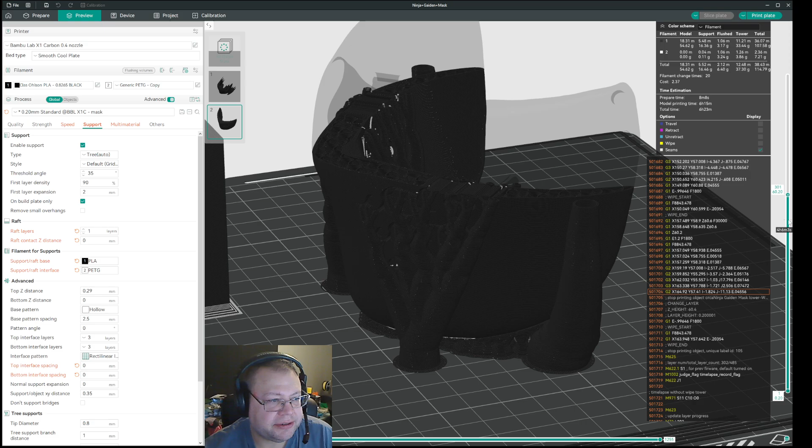Okay, welcome to a new small video. In this video I'm gonna talk a little bit about tree supports and the fact that, like in this picture here, I'm trying to use PETG as a support interface to easily remove the supports, but

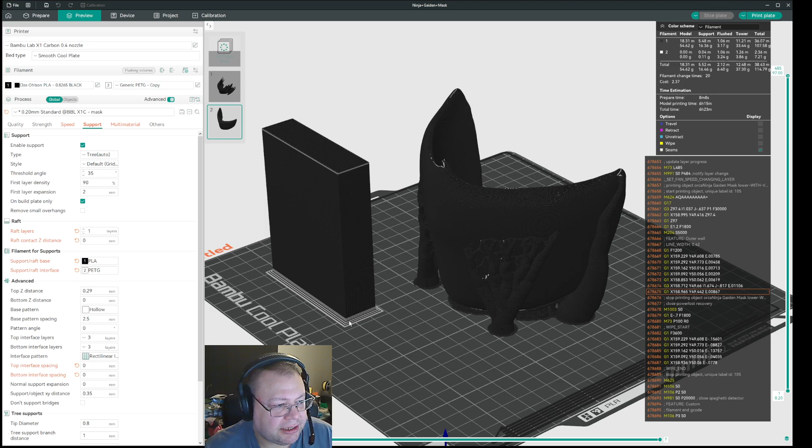as you can tell from the purge tower, there are no actual support interfaces here, because you can see there's white there and there's white there, and white here is the PETG. So basically you can see here on top there is no support interface on the top of the tree supports. So this video I will show you how you can put it there and why you should not put it there.

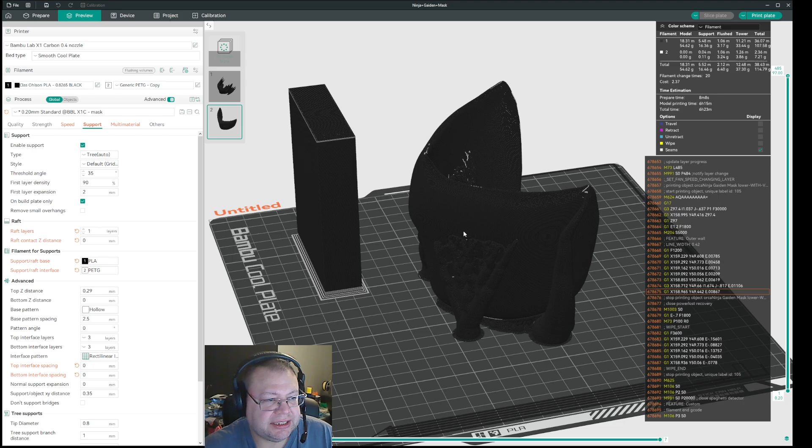So basically the tree supports up here at the top have a certain diameter, and it goes without saying they need to have a certain diameter to be able to support the structure above. When you print with just one filament, it's not really a problem because it will just bridge over it. But when you use a support interface with a different filament to be able to easily remove the supports, then you have a sort of a problem.

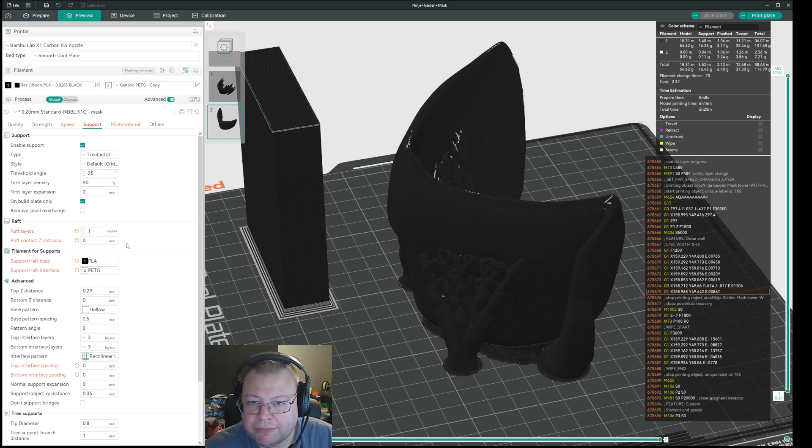And in this case, you can see here, I have selected PLA as the support structure, and I have selected PETG as the support interface, and I have 3 top layers and 3 bottom layers for it. And I set top spacing to 0 and bottom spacing to 0. And I want to use one raft because I want to be able to easily remove it.

So let's go and see on the raft. The raft looks like this. That's the raft, that's white. That's the supporting underside of the PETG. And you can tell everything else here is pre-layout for the tree supports. So when we build up this, you will see you get the,

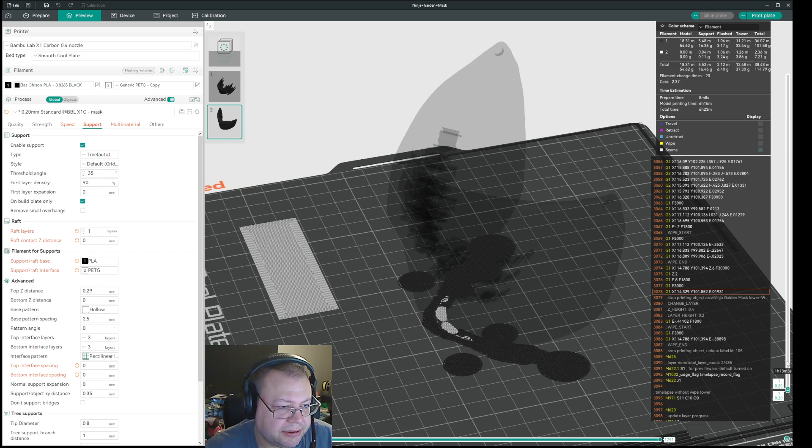let's see, so here you see on layer 1, that's the raft, which is white, and then you start getting the black here. That's the first part of the model itself, and then it starts printing, and here you see you have support interfaces, because the size of the supports is there, and you can see that it's building the model on top of the support interfaces.

And I have 20 filament change times, as you can see up here, and all of those filament changes are at the bottom. So if you count the layers, you get to layer 18, so almost all of them. Let me see. Layer 16 is the last one. You can see there's a change here, so 16, and then it's only printing PLA after that.

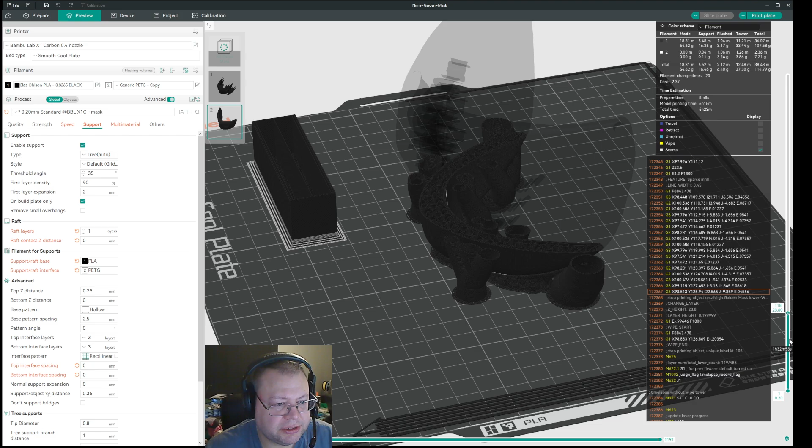And then you can see it's building the support structures for the tree supports, and as you get towards the place where it's supposed to support, it will get narrower and narrower and narrower. And in some cases you can see that here it is already supporting, but it's not giving any interface layers for the supports, as you can see. And now it's done with all the tree supports. There's still no interface layers.

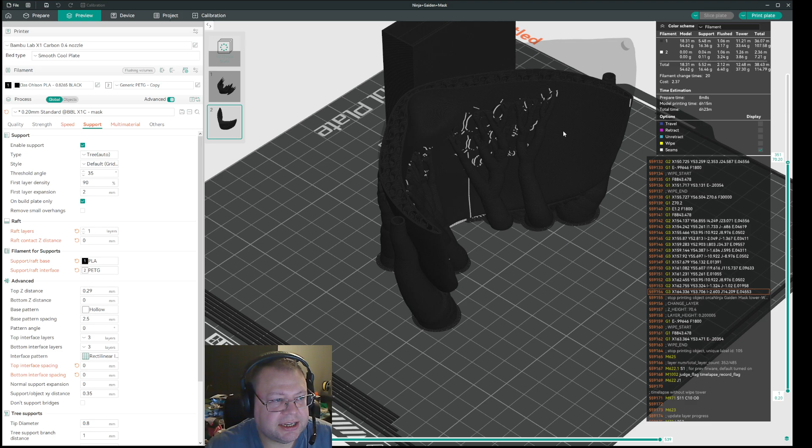So what has happened here is that it has printed the bottom parts with PETG supports, but it hasn't printed the top ones. But it does get to the top here. If we go down a little bit so we see exactly where you have one there. That's a tiny nudge of PETG. And another one, and another one. So that's 3 layers. And then it prints on top.

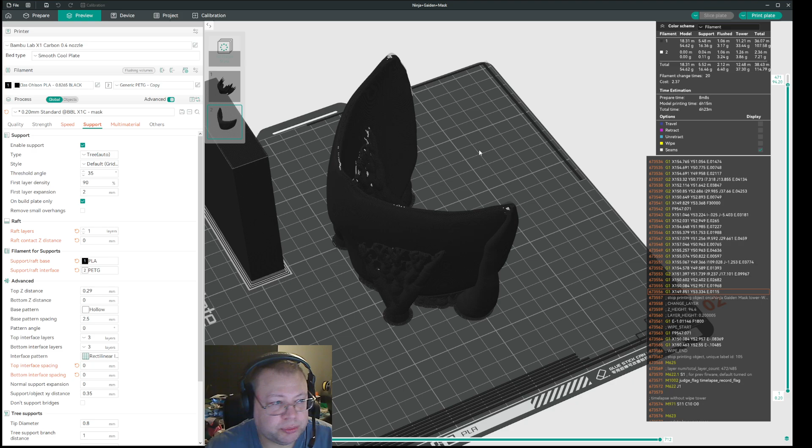If you consider how much filament would have to be wasted to print those small nudges of PETG, I would rather, in my case, just not use supports there. There's also a little bit here on those layers. There, and there. And then there's nothing. And that is all that is there to print. And to get to that point, it would have to waste all this black filament and all this PETG filament just to be able to print those 3 layers of small nudges there.

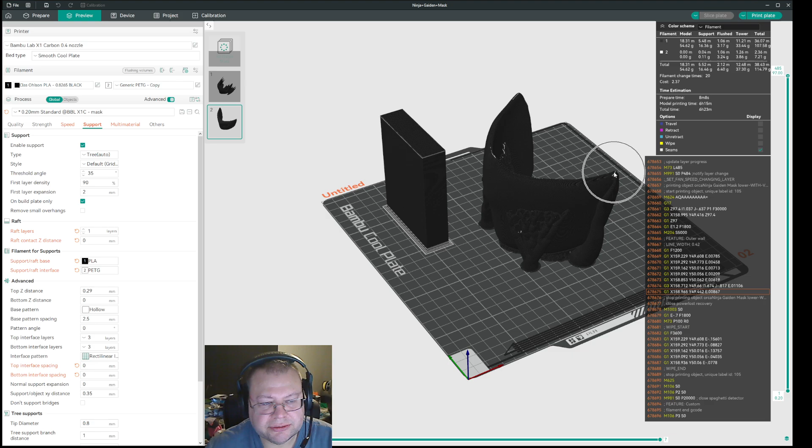Now, the main problem I wanted to address is that in some cases you want to put an interface layer on top of a tree support, and you have this problem here. So how do you do it? Well, there is a setting in Orca Slicer / Bambu Slicer which is called tree supports.

Sorry, it's under the tree support. Under support, and then you need to have selected tree, blah blah blah. Okay, and then at the bottom you have tree supports, and then you have something called tip diameter. It refers to the topmost tip of the tree support. And if you hover over it, it says branch tip diameter for organic supports.

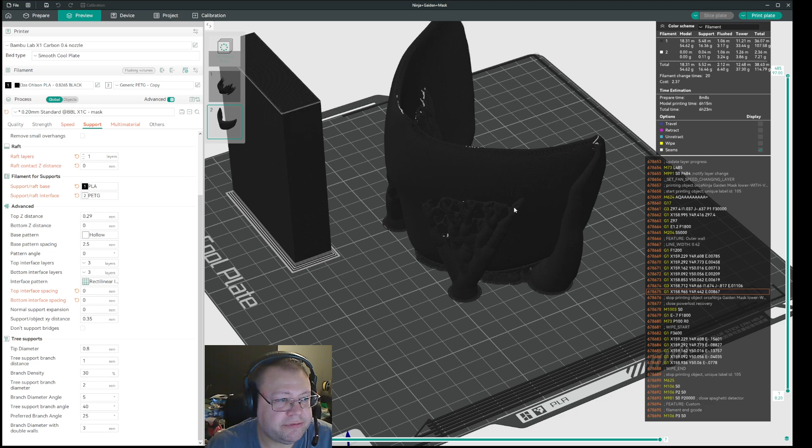That means that this value identifies the minimum value that a tree support tip needs to have to be able to add interface layers. Otherwise, it would just print straight on it. In this case, every single one of these supporting structures, even on the back here, everything here is below this value in the diameter of the tip, which means that it will not create a top interface layer with PETG.

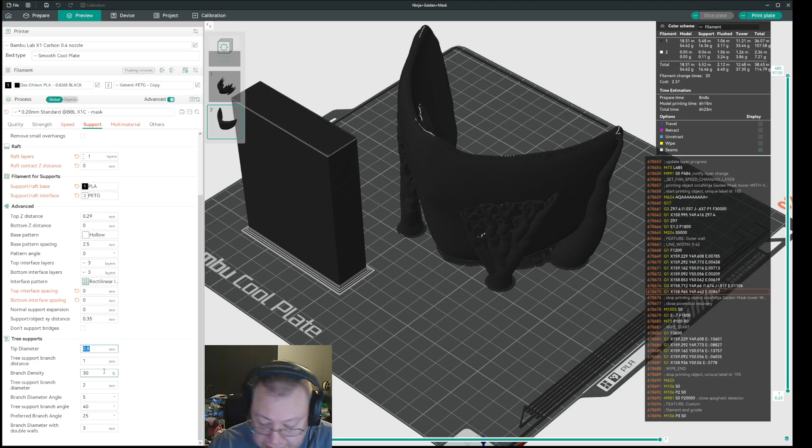So let's just say I want to reduce this to make it print. So I set it to 0.2. Then you get an error: organic support tree diameter must not be smaller than the support material extrusion width. Okay, so let's go to quality and check how big the extrusion width of the support material is. You can find that here under quality and support, and you see it's set to 0.42. So if I take that value and go back to support and replace that value with 0.42, the error goes away.

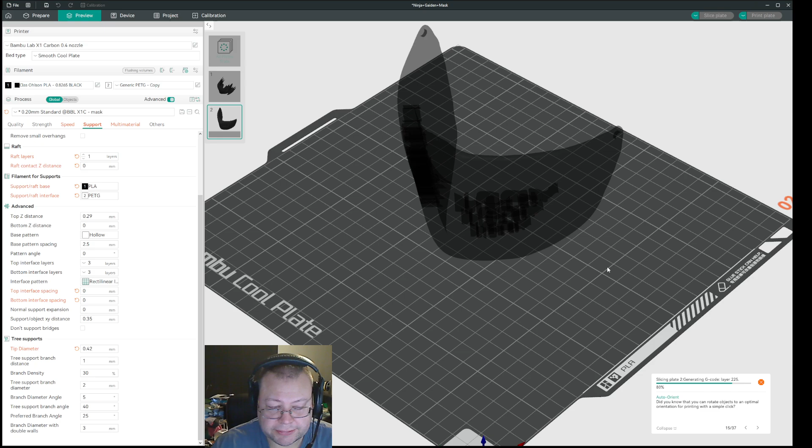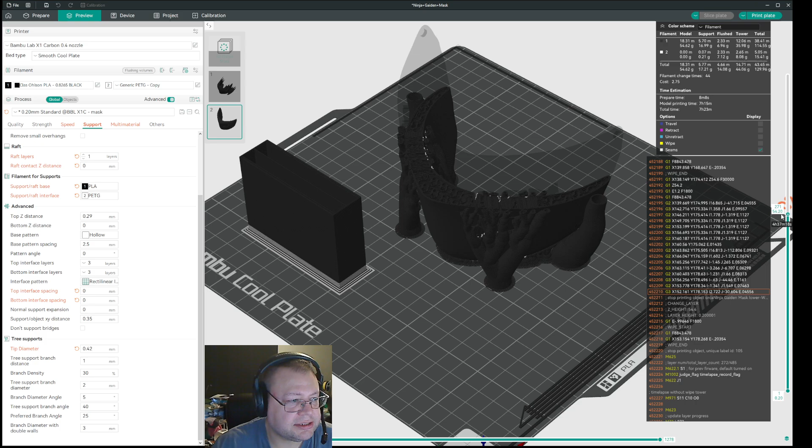What happens if you slice it again? Remember, we had 20 filament changes before. Now I have 44 filament changes, you can see here. And you can also see that some interfaces have been written, and on the purge tower there have been written interfaces. So let's go down a bit into the model and analyze this. Let's say we are looking at the model and we'll just go up layer by layer.

There's the first layer. Where is the PETG on this? It's there. Exactly there. And is there more? Seems to be a little bit there. Okay, then you get a black one on the same level, line above. And then you get another one. Where is that? The small nudge there. A little bit here, maybe that's a seam. There's a little bit more here. And there's a small tiny nudge there.

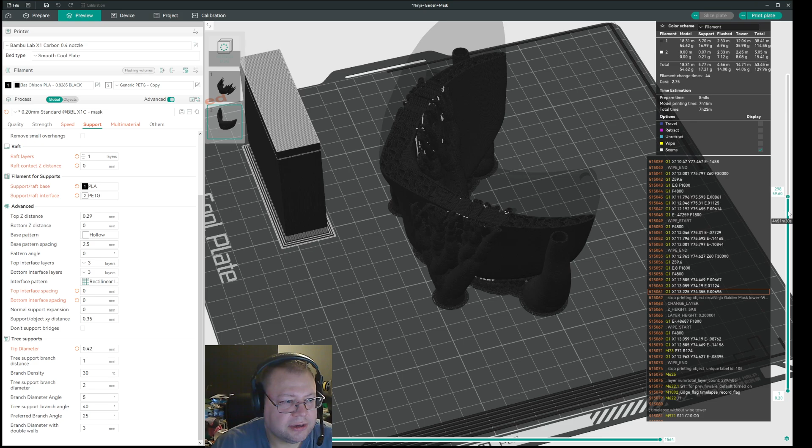And then it's just black, and then it becomes tiny support interfaces here and there, and a little bit there again. And you can see in this area here there are just a few support interfaces painted, and here.

So imagine that you're printing, and for every single layer there, it's flushing, it's printing to the purge tower, it's wasting a lot of filament just for these tiny small pieces, which may not have any relevant function when it comes to removing the filament. Now, the big thing here is that we have reduced the size that should be used for filament interface. We said that if the tree support tip is above 0.42 millimeters, you should print interface layers. That's what you do with this setting here.

But you can decrease that a little bit. Remember that you can reduce this below 0.4. So let's say I set it to 0.3. And you see, it cannot be smaller than the extrusion width. But you can also change the extrusion width to smaller than that, 0.3. So if I set that to 0.3, the error goes away.

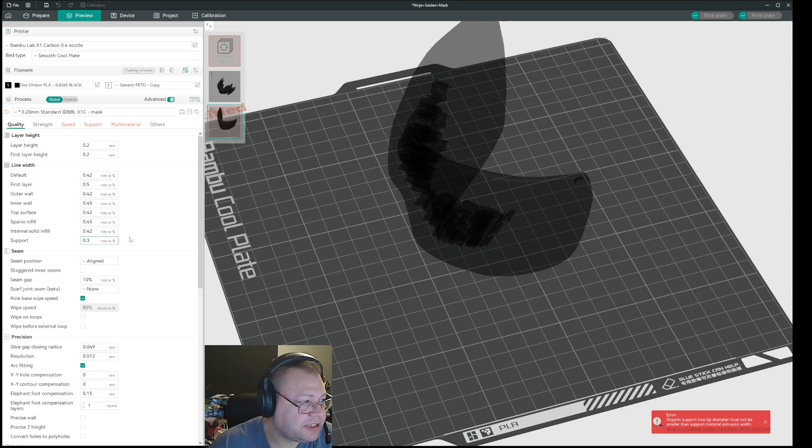What you have to remember is, imagine you have a chewing gum, and the chewing gum has a fixed diameter when you pull it out. If you're reducing the extrusion width, you're stretching that piece of chewing gum. On an FDM printer, what happens is that it lowers the pressure and at the same time it keeps extruding, so there's less pressure while it's extruding, and the width of the line becomes smaller.

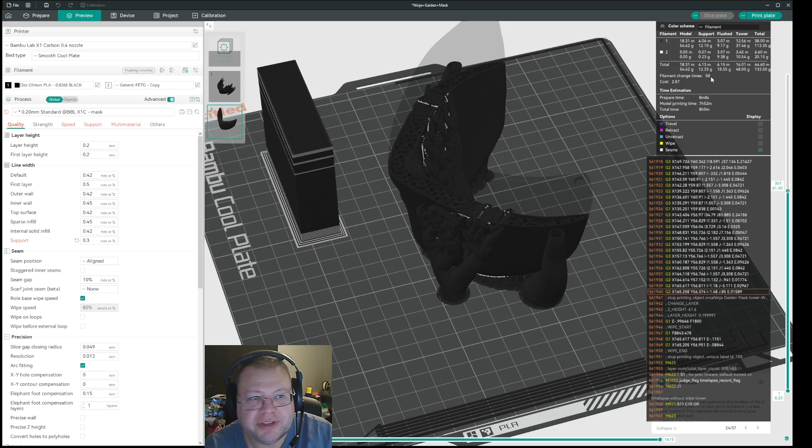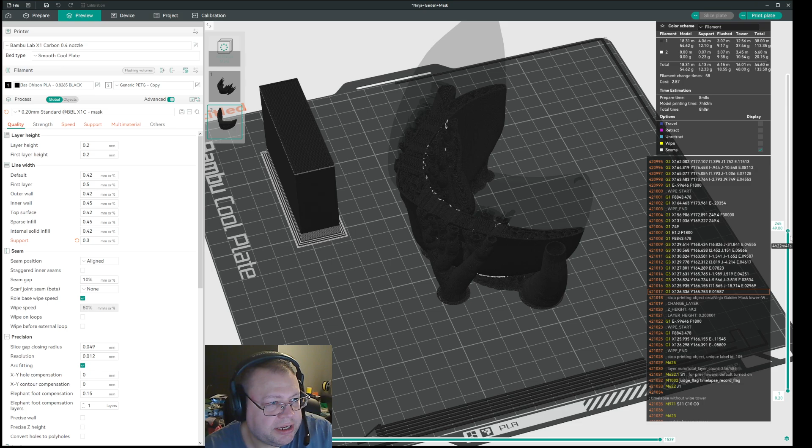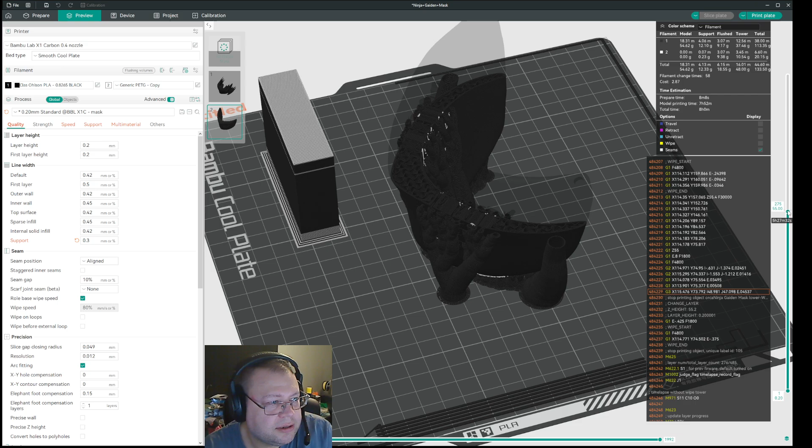When you reduce the width of the support, you can see here that I get 58 filament changes, and you can also tell that there are more filament changes here. So let's analyze a bit. It's there. Just check the model, it's here and there mostly, and it keeps building, and then it's finished, and then it goes a little bit more, and it has just a small nudge here and there, and it continues to go up. There are a few places here and there, and it continues to go up again.

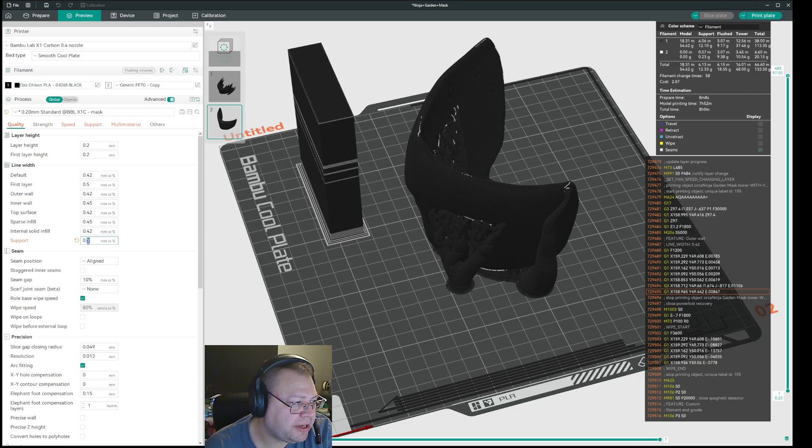It's not printing much PETG to work as interface. Then it just continues up, and at the end you get interfaces here and there. So you're wasting a lot of filament to cover interface layers in very small areas. I usually don't put my line width below 0.4, because it would sometimes not look good on the print, since you're using a 0.4 nozzle and trying to force the width to less than the nozzle width.

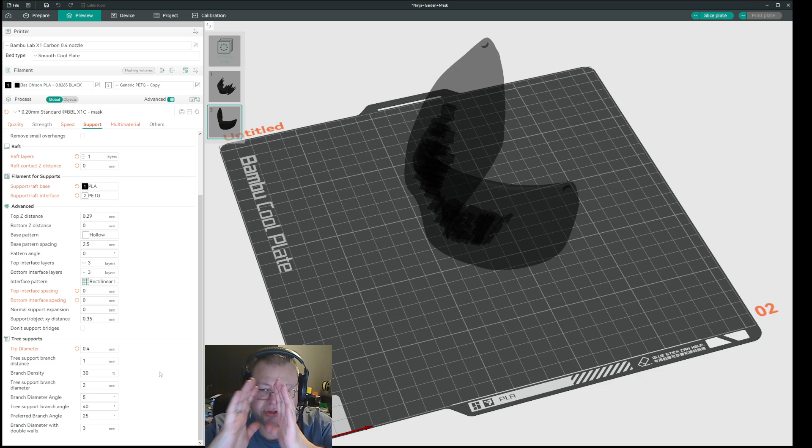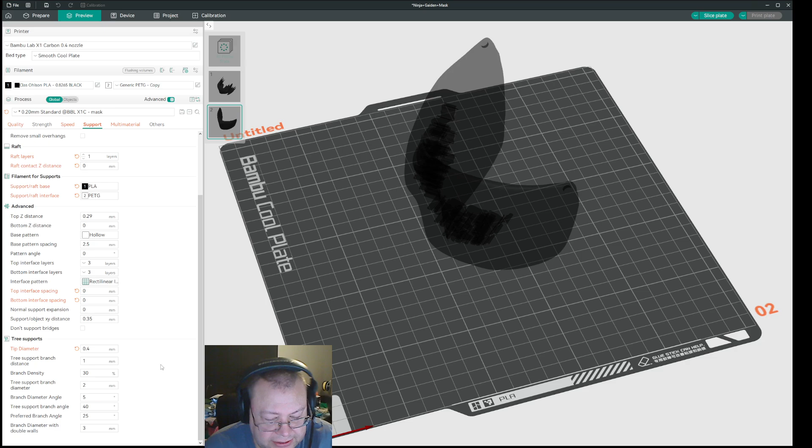So my recommendation is, if you're using tree supports, unless you're supporting something that is really wide and you have a really big tip of the tree support, then I would not use an interface layer using a different filament type like PETG, because it would just be a lot of wasted filament to get there, and then it's finished. There's no point. Just remove that with a file afterwards, and it's a lot less wasted filament.

Now, the other part of this video: in the original video I made, I actually had to make a sub video because I forgot about it, but now I'm going to do it. So I've reset the tip diameter to 0.8, and I'll reset this one to what it originally was. Okay, so I'll slice the plate. I'll show you what I mean in the second part.

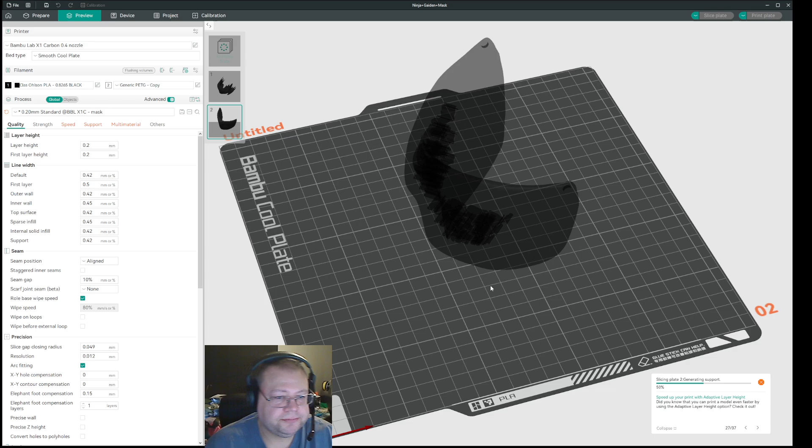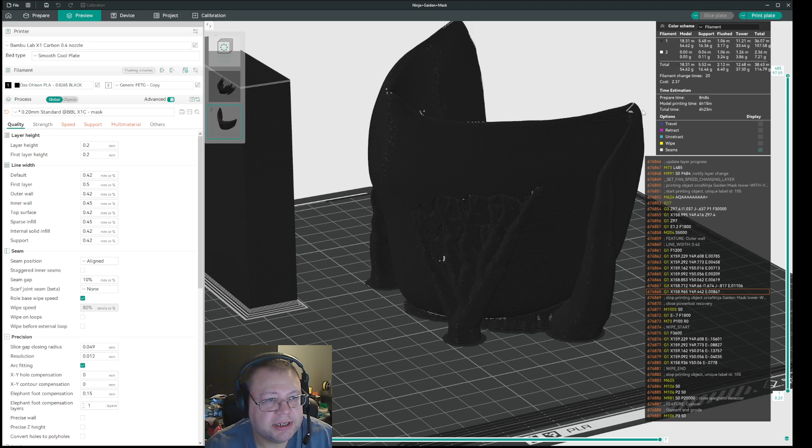So you can tell here that because the diameter of the tip of the support is so small, it's not using interface layers. Perfectly fine, but why is it doing this? It's because these small areas on top of this tree support are actually above 0.8, like here. It's above 0.8 millimeters in diameter. Hence, it will waste filament to get to the top to print those support interfaces.

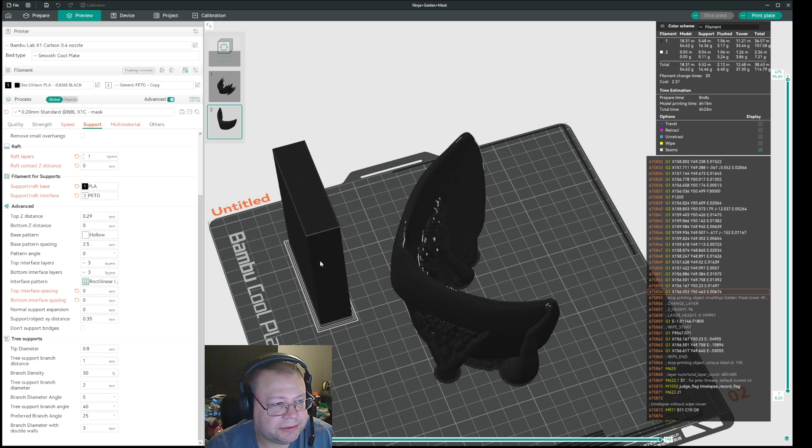There, you can see, it's support interfaces, and it will do that for 3 layers. And then it's finished. And for doing that, you wasted all this black filament just to get to the top, and you lost a lot of filament in the purging between the filaments. So how can you prevent this from actually printing interface layers? The first one was how do you enable interface layers on top of the tree support, and the second one is how do you remove the interface layers so that it doesn't print them.

We go down to the setting here, and basically you have to increase this to say, I want a bigger reference value to be used for the tip of the tree support. So if I set it to 0.9, for instance, and I slice it, it will still not be enough. In my case, I know that those tree supports are roughly 0.95. So if I set this to 0.95, you can see I'm still getting the supports.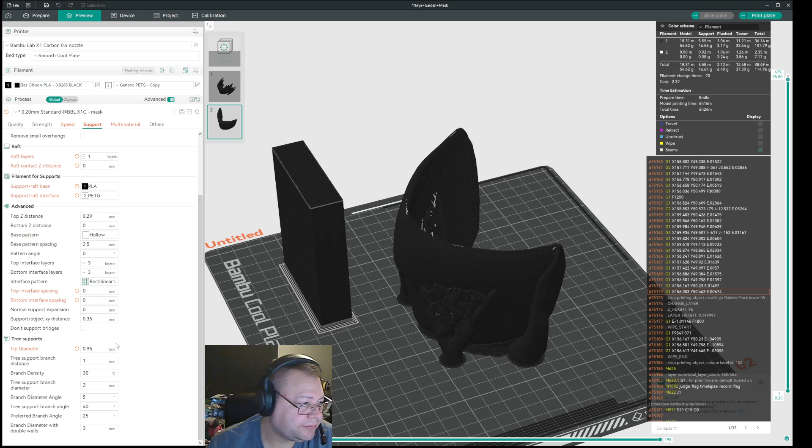If I set this value to 0.95, this is a good way of measuring how big the tip of the tree supports is in the area. 0.95, it's there. If you want to be really nitpicky, maybe you can go 0.955 and slice it again. But in that case, you could have just written 0.96.

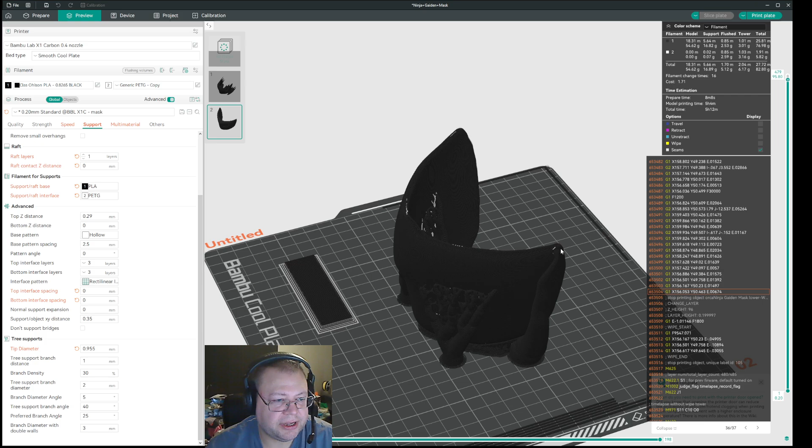Now you see that it's dropped down. It's no longer printing the purge tower past a few other supports here. In this case, I could have just said 0.96 to have it above that. And it's no longer printing support interface layers at the top.

And you are basically saving all the filament you would have wasted in the purge tower, and you're saving all the filament you would have wasted in those 3 filament changes, actually 6. So it's 3 layers of PETG, so change to it and then 3 layers to change back, so it's 6 purges of filament and printing to the purge tower, flushing of filament, sorry.

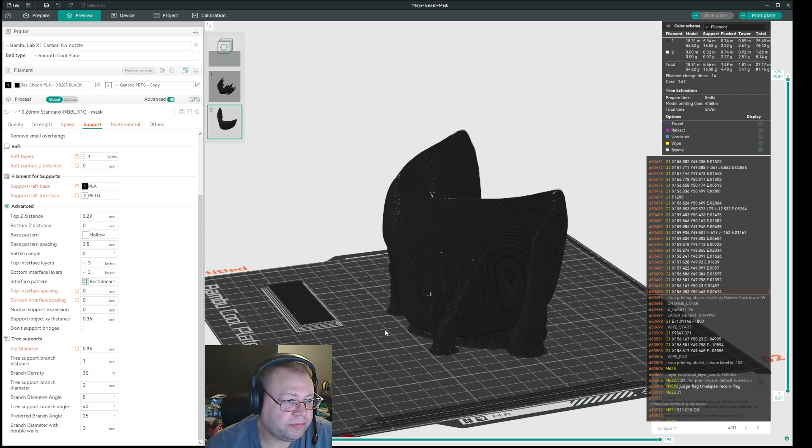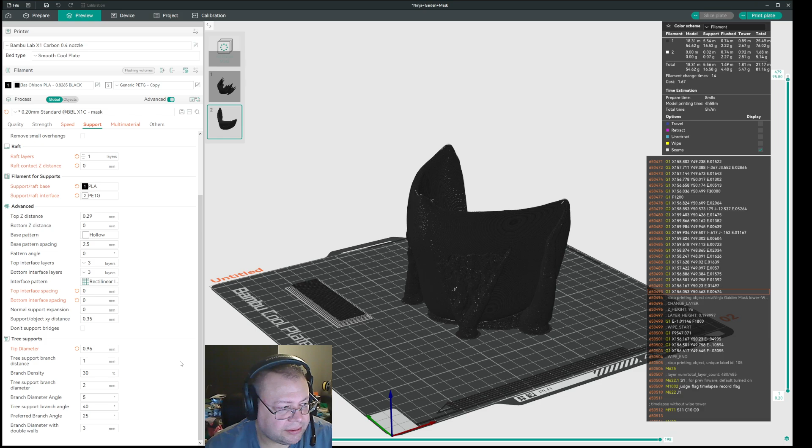So by adjusting this value here on the tree supports tip diameter, you can basically say, I don't want to print any support interfaces except raft and where the diameter of the support equals this or higher. And then you can print something like this using support at the bottom, but basically not using support for the tiny trees, which you can just use a file to remove afterwards.

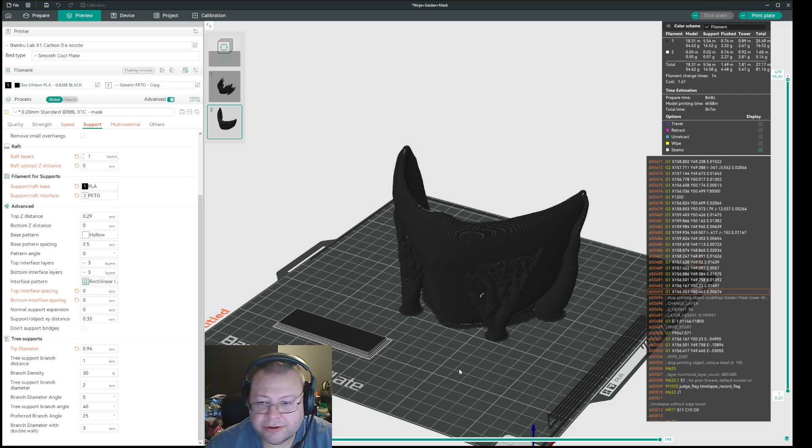So I hope this was a very helpful video for how you can adjust the settings in your slicer when you are using PETG, PLA, or other types of filament, like I think ABS or something like that, but polyester works as well. But anyway, it's just to show you that you can actually get around some problems like this and save a lot of wasted filament on your print.

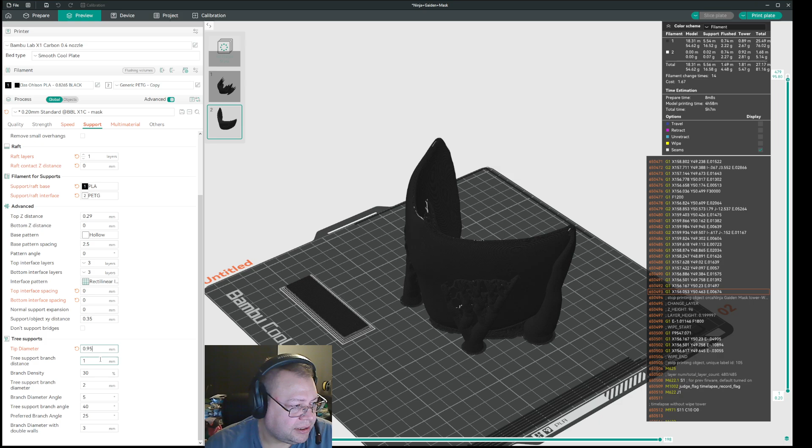Not to mention time. Printing a purge tower like this takes a lot of time, and doing the filament changes takes a lot of time. Let's see how much time you saved. Now the model printing time is 4 hours and 58 minutes, 5 hours and 7 minutes total time. Let's bring that down to 0.95 and see how much time we saved on the print.

Yeah, more than an hour. So now the model printing time is 6 hours and 15 minutes, and the total time is 6 hours and 24 minutes. So yeah, you save time as well.